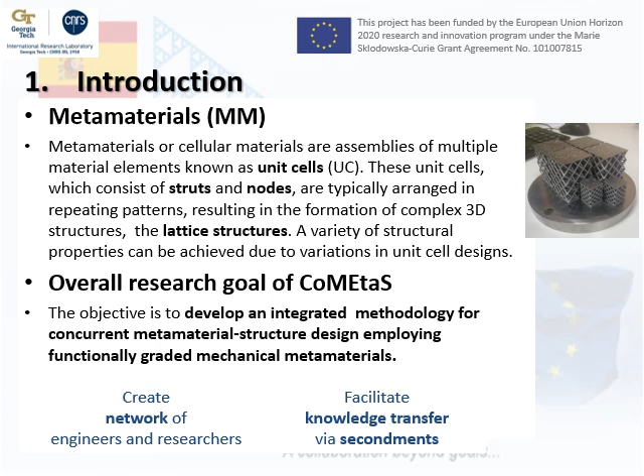In the part corresponding to the secondments in Atlanta, we have developed constitutive models for 3D printed materials. In particular, we have developed a crystal plasticity finite element model to predict the mechanical properties of these materials. These models require information regarding the structure of the material, or better said, the microstructure. The microstructure is the aggregate of crystal defects, orientation, and phases of the material. This information is necessary because the microstructure provides the state variables for the constitutive equations.

For that reason, we must obtain this information either from experiments, where we would perhaps require EBSD, or from simulations. Simulations have the advantage that they can generate data at faster and cheaper rates than experimentation. So in the framework of this project, we have also developed a model for microstructure prediction. At the conclusion of the project, we expect to combine these two models and formulate surrogate models by means of process-structure-properties relationships.

So here we have the objectives of this work package. In the first work package, we're going to implement a crystal plasticity model. In the second, we're going to develop the code for homogenization. This is necessary because we're going to reduce a problem which is multi-complex: many different processing parameters affect the evolution of the microstructure, and the microstructure itself influences the mechanical properties of the part we're trying to fabricate. So it's extremely important to reduce that complexity, and for that we need different mathematical techniques compared to those we utilize, for example, for the simulation.

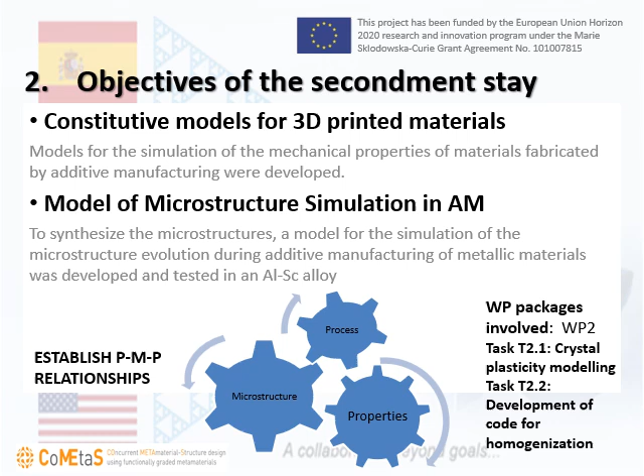And this is what we aim to do at the end of the project. At the end of the project, we expect to have the tools necessary to predict the final properties of a component given a certain set of processing parameters.

Excellent. So in metal additive manufacturing, we utilize metallic powders and a heat source to melt local volumes of powder that upon solidification allow building a component layer by layer. This technique is very well known for plastics, but recently it has also been utilized for metallic parts. Additive manufacturing has become a very relevant industrial process, and we expect that in the future it is going to be even more relevant. After solidification, the microstructure has been found to diverge from the microstructure found after conventional processing. The reason for this is solidification and also the application of the laser.

So the material is subject to very high cooling rates. In addition, there is a very directional heat flow gradient, and for that reason, the microstructures show characteristics that are not usual in conventionally processed materials. For example, we usually observe columnar grains, but depending on the processing parameters, there are different microstructures that we may expect.

As I mentioned before, because they are different from those in conventional materials, we also expect these materials to have different mechanical properties, because the microstructure itself contains the state variables for the constitutive laws that define the mechanical properties of the material.

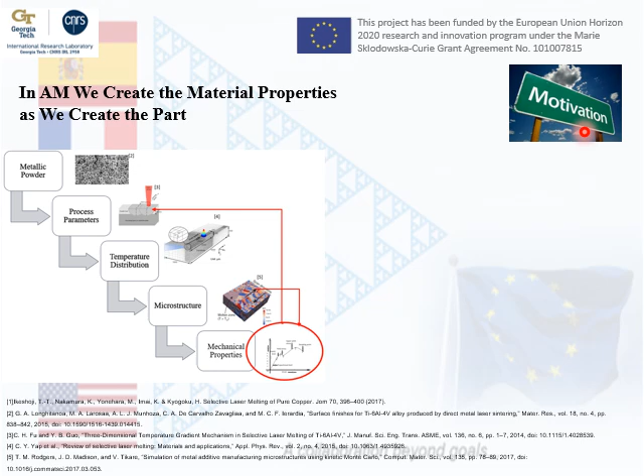This is not always going to be the case, but we can expect that at least the microstructure is going to reflect the most fundamental features that we can also expect in the experiment.

Okay, so here in this slide we have essentially the process of additive manufacturing. We have a metallic powder, and certain process parameters utilized for the fabrication. There is a certain temperature distribution caused by the heat source. In this case, the laser is what we normally utilize for melting the powder, and this results in the formation of the microstructure. And the microstructure itself determines the mechanical properties.

So what we would like to do is, simply by considering only the processing parameters, be able to finally predict the mechanical properties. That will be the final objective of this project.

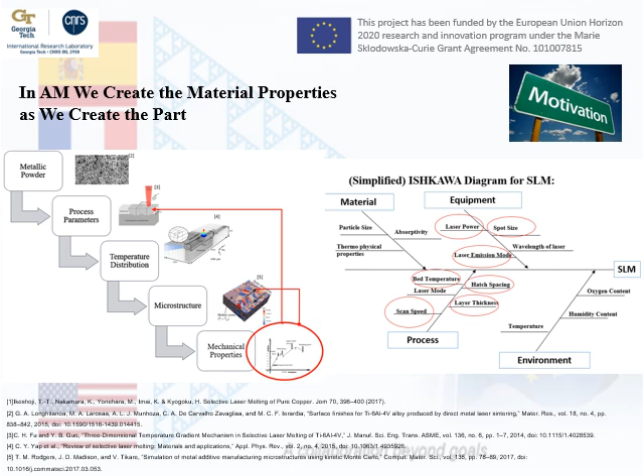In any case, as I mentioned before, we developed a crystal plasticity finite element model for predicting the mechanical properties of the material. But it is also necessary to be able to simulate the microstructure development during additive manufacturing. To this aim, we're utilizing a cellular automaton model.

In the cellular automaton model, a representative volume element is the part of a component or of the material which better represents the behavior or structure of that material, and it is the minimum volume that we can consider for this aim.

We discretize the volume into numerous cells, and these cells can have different sizes. Usually we utilize cuboidal cells, and each of these cells can have different states. They can be solid, in the case of a crystal, after or during solidification. They can be powder, before the process begins. They can be liquid during melting, and they can also be void or gas, to represent the porosity in the additive manufacturing process.

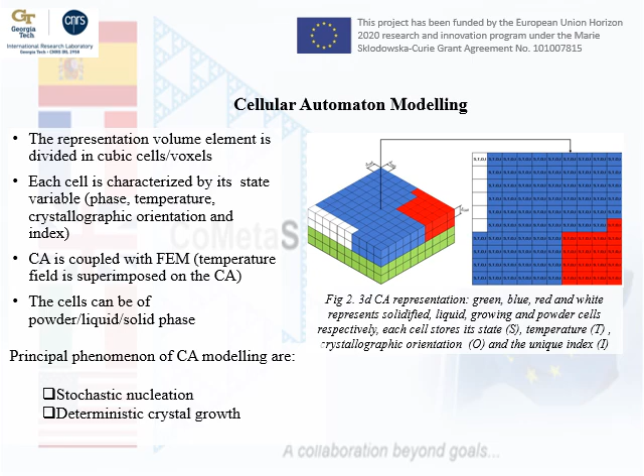And to do this, in the model we need to separate these two different mechanisms. On one hand, we need to consider nucleation, and on the other hand, we also need to impose a growth model for the crystal growth during solidification. The nucleation model is usually stochastic in nature, and the reason for this is because nucleation is a very complex process. So we usually consider two different nucleation mechanisms, which are also observed experimentally in additive manufacturing.

So we consider epitaxial nucleation. Epitaxial nucleation occurs along the solidification line, and this normally corresponds to the grains that form at the border of the melt pool, and they grow in a directional way. In addition to that, we can also consider bulk nucleation. This happens in the melt, and normally they have random orientations. In the case of epitaxial nucleation, the orientations of the grains are very directional. And when the dominating mechanism is epitaxial nucleation, the microstructure is normally going to end up as a columnar microstructure.

Because we're considering a stochastic process, we also need to consider the nucleation number. This is the number of nuclei that we observe per unit volume in the melt pool. And for nucleation, we have to consider a probability of nucleation. This probability depends on the undercooling: the larger the temperature difference between the current temperature and the melting point, the more likely a nucleation event is to happen. And once we have these grains nucleating, we also need to consider that the difference of the temperature of a cell with respect to the melting point is also going to cause the growth of the crystal.

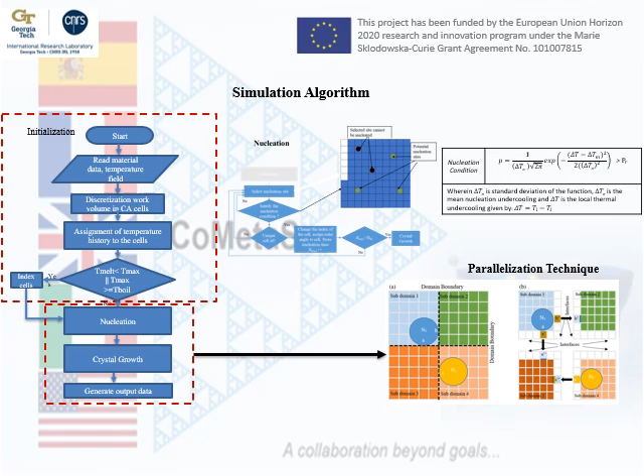Okay, so now I would like to show the case study. What we are utilizing to validate our simulation, and also to have an interesting case to study, is the aluminum scandium system. This system is particularly interesting because these alloys could be used in the future by the automotive industry, for example. Scandium and aluminum form second phases during solidification, right?

And for that reason, the microstructures obtained after additive manufacturing are very complex. These microstructures are characterized by very fine grains, and in between these zones with very fine grains we also have columnar grains. For that reason, the properties of these alloys are very particular, in the sense that they are positively particular. They show excellent mechanical properties.

This happens because at high temperature, during solidification, there is a region where we observe the formation of particles, the scandium aluminum second phase particles, right? And because in the liquid we also have an additional phase at the surface between the particles and the liquid, we also have a reduced work of nucleation. Essentially this means that the probability of nucleation increases.

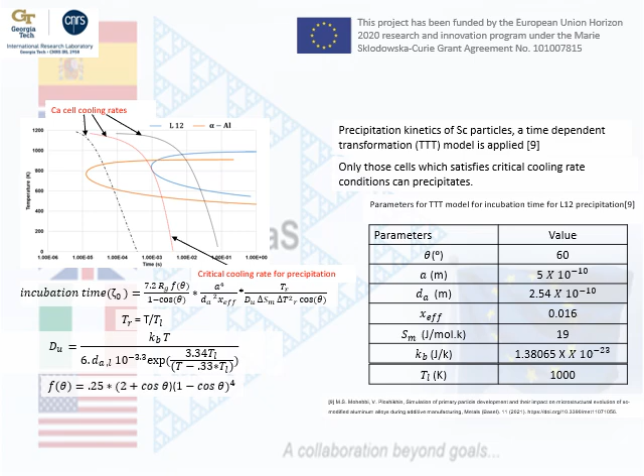And once we have considered the nucleation of this particle, we can also consider an increased probability of a crystal nucleating there. Okay, and this is going to result in a very specific microstructure, as we're going to see in the next slide.

But before that, as we mentioned before, we are also simulating the mechanical properties of the material, right? Because the aim of this project is to simulate from the very beginning, from the processing parameters to the final properties. So in that case, we need also to correlate the microstructure that we simulated with the cellular automaton to the final properties, which are simulated in this case by utilizing a crystal plasticity model, right?

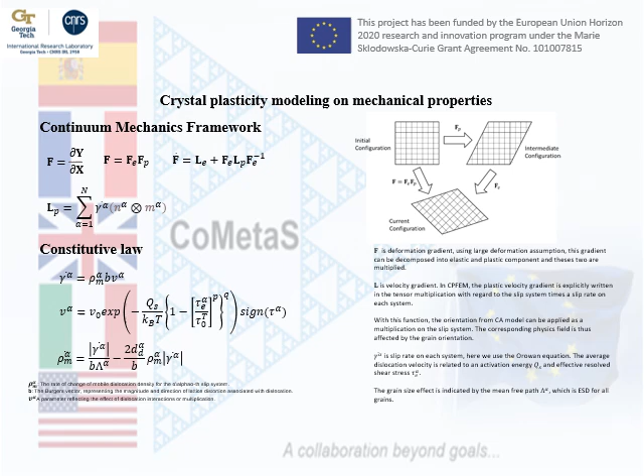The crystal plasticity model I'm not going to explain further because this was already explained in the first part of this project. However, I will simply mention that we're utilizing this model to predict the mechanical properties of the material. And now to the results.

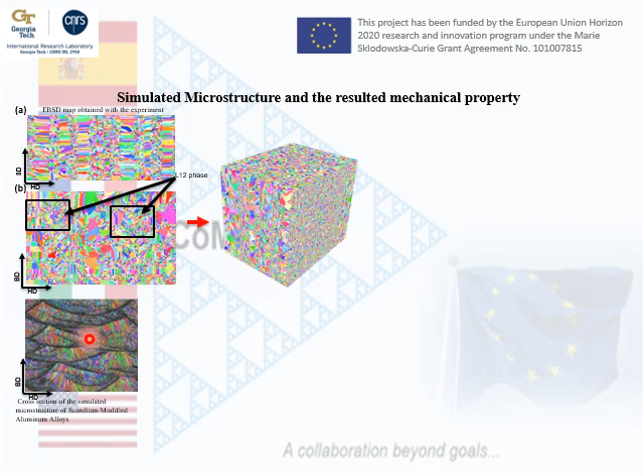We are also doing this because we need to transfer the three-dimensional information from the cellular automaton model to the crystal plasticity model, right? And the crystal plasticity model is also limited by memory. For that reason, we cannot fully utilize all of the information from one model in the other. So we need to make a simplification, and this simplification means that we need to utilize a smaller volume than the one that we can simulate in the cellular automaton, for example.

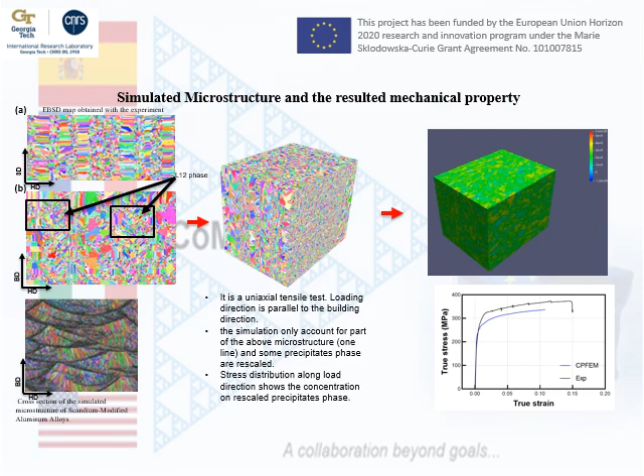However, we have to mention that we are not considering all of the factors that influence the mechanical properties of the material. For example, in the crystal plasticity model that we implemented, we didn't take into account the effect of solid solutes, right? And by considering the effect of solid solutes, we expect that the differences are going to be less than the ones indicated here. The reason is simply that we didn't have time to implement the effect of solid solutes into our simulation. However, we expect to improve this in the future, so we can also improve our results.

To conclude, we utilized the cellular automaton model to simulate the grain structure of the scandium aluminum alloy. We observed the fine grains and also the columnar grains. The microstructural output was coupled with crystal plasticity finite element simulations, and we were able to predict the mechanical properties of the material. Future work includes improving the accuracy of the crystal plasticity simulations and also the cellular automaton.